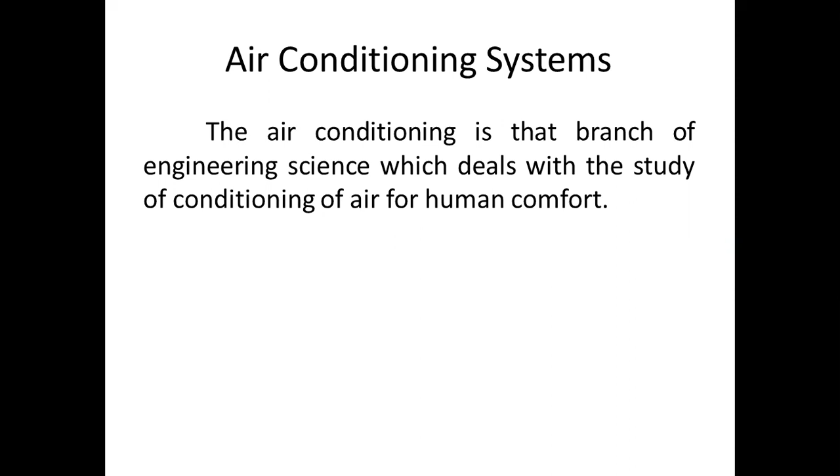Factors affecting comfort air conditioning. There are certain factors which affect the comfort air conditioning. They are temperature of air, humidity of air, purity of air, and motion of air.

So, temperature of air: in air conditioning, the control of temperature means the maintenance of any desired temperature within an enclosed space, even though the temperature of the outside air is above or below the desired room temperature.

Humidity of air. The control of humidity of air means the increasing or decreasing of moisture contents of air during summer or winter respectively in order to produce comfortable and healthy conditions.

Purity of air. It is an important factor for the comfort of a human body. It has been noticed that people do not feel comfortable when breathing contaminated air, even if it is within acceptable temperature and humidity ranges.

Motion of air. The motion or circulation of air is another important factor which should be controlled in order to keep constant temperature throughout the conditioned space.

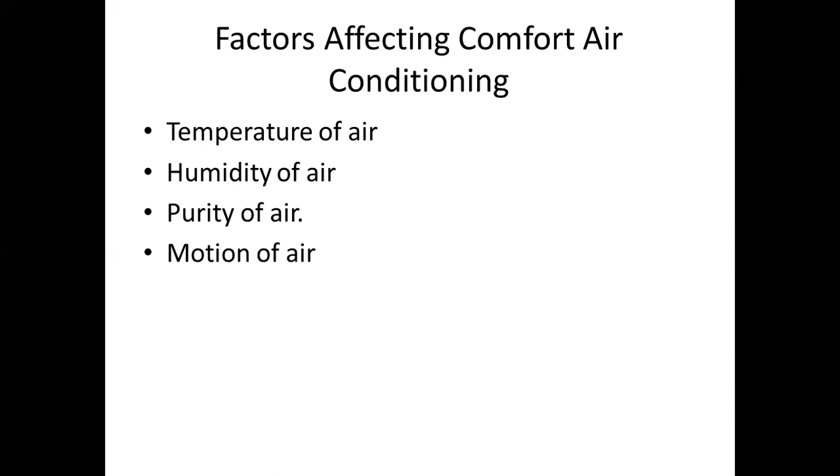Air conditioning system. The system which effectively controls the human comfort with these conditions to produce the desired effects upon the occupants of the space is known as air conditioning systems. The equipments or parts used in an air conditioning system are circulation fan, air conditioning units, supply duct, supply outlets, return outlets, and filters.

Circulation fan. The main function of this fan is to move air to and from the room. Air conditioning units. It is a unit which consists of cooling and dehumidifying process for summer air conditioning or heating and humidification processes for winter air conditioning.

Supply duct. It directs the conditioned air from the circulating fan to the space to be air conditioned at proper point. Supply outlets. These are grills which distribute the conditioned air evenly in the room.

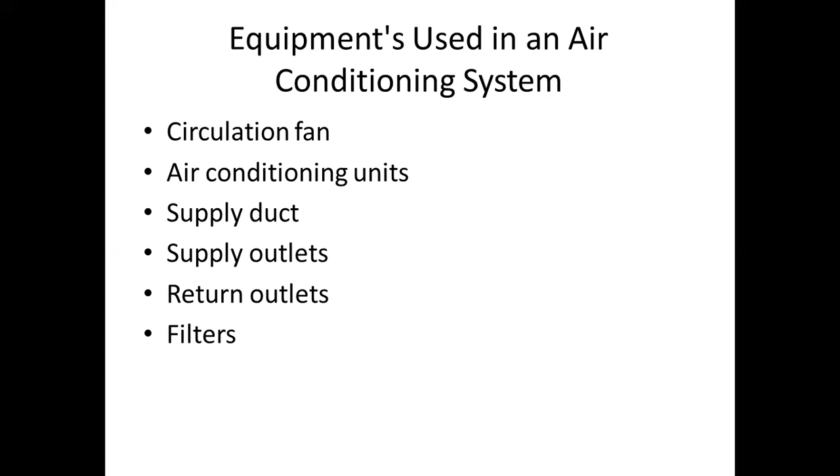Return outlets. These are the openings in a room surface which allow the room air to enter the return duct. Filters. The main function of the filters is to remove dust, dirt, and other harmful bacteria from the air.

Classification of air conditioning systems. The air conditioning system may be classified according to the purpose, according to season of the year, and according to the arrangement of equipment. First, according to the purpose, the air conditioning system is classified into comfort air conditioning system and industrial air conditioning system.

According to season of the year, the air conditioning system is classified into winter air conditioning system, summer air conditioning system, and year-round air conditioning system. According to the arrangement of equipment, the air conditioning system is classified into unitary air conditioning system and central air conditioning system.

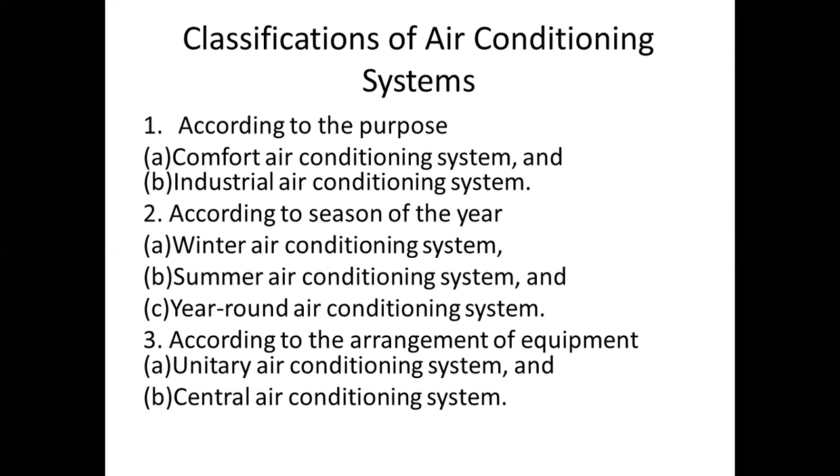Comfort air conditioning system. In comfort air conditioning, the air is brought to the required dry bulb temperature and relative humidity. If sufficient data of the required condition is not given, then it is assumed to be 21 degrees Celsius dry bulb temperature and 50% relative humidity.

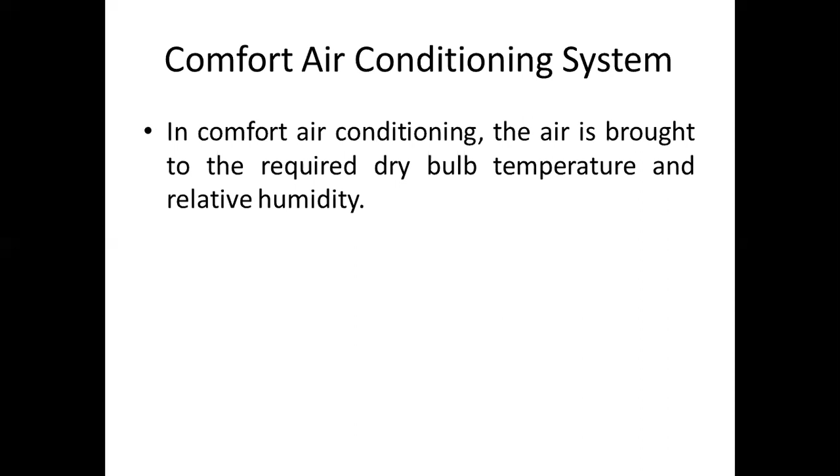Industrial air conditioning system. It is an important system of air conditioning these days in which the inside dry bulb temperature and relative humidity of the air is kept constant for proper working of the machines. Some of the sophisticated electronic and other machines need a particular dry bulb temperature and relative humidity.

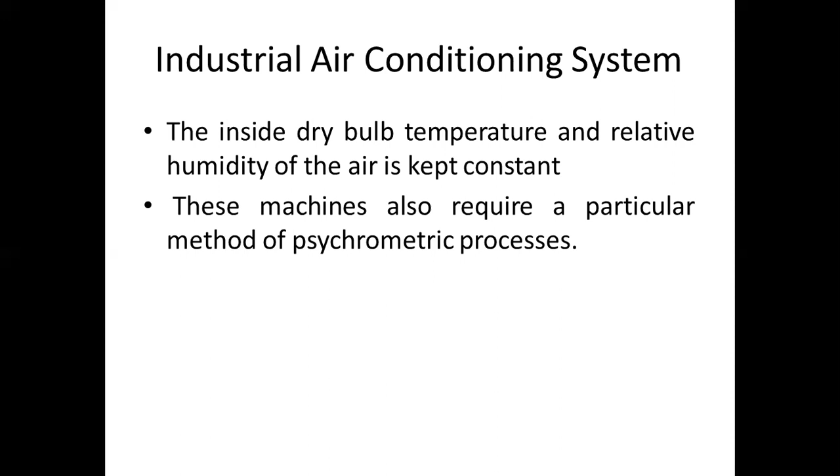Winter air conditioning systems. In winter air conditioning, the air is heated, which is generally accompanied by humidification. The outside air flows through a damper and mixes up with the recirculated air, which is obtained from the conditioned space. The mixed air passes through a filter to remove dirt, dust, and other impurities.

The air now passes through a preheat coil in order to prevent the possible freezing of water and to control the evaporation of water in the humidifier. After that, the air is made to pass through a reheat coil to bring the air to the designed dry bulb temperature. Now the conditioned air is supplied to the conditioned space by a fan.

From the conditioned space, a part of the used air is exhausted to the atmosphere by the exhaust fan or ventilators. The remaining part of the used air is again conditioned. The outside air is sucked and mixed with the recirculated air in order to make up for the loss of conditioned air through exhaust fans or ventilation from the conditioned space.

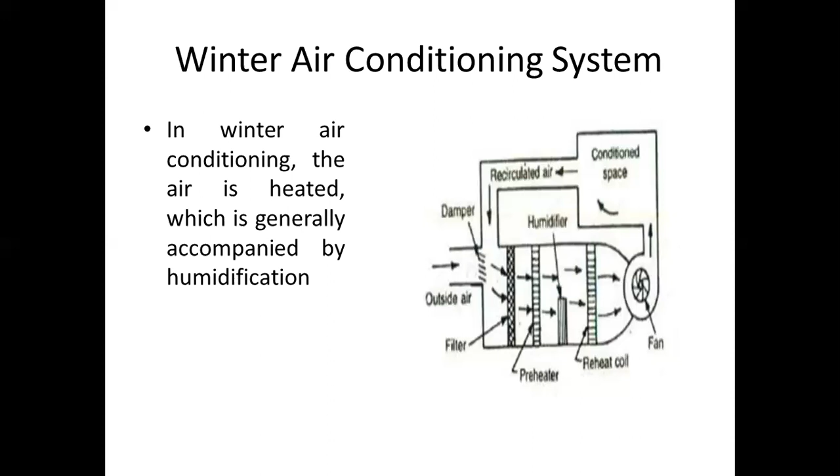Summer air conditioning system. It is the most important type of air conditioning in which the air is cooled and generally dehumidified. The outside air flows through the damper and mixes up with the recirculated air. The mixed air passes through a filter to remove dirt, dust, and other impurities. The air now passes through a cooling coil. The coil has a temperature much below the required dry bulb temperature of the air in the conditioned space.

The cooled air passes through a perforated membrane and loses its moisture in the condensed form, which is collected in a sump. After that, the air is made to pass through a heating coil, which heats up the air slightly. This is done to bring the air to the designed dry bulb temperature and relative humidity. Now the conditioned air is supplied to the conditioned space by a fan.

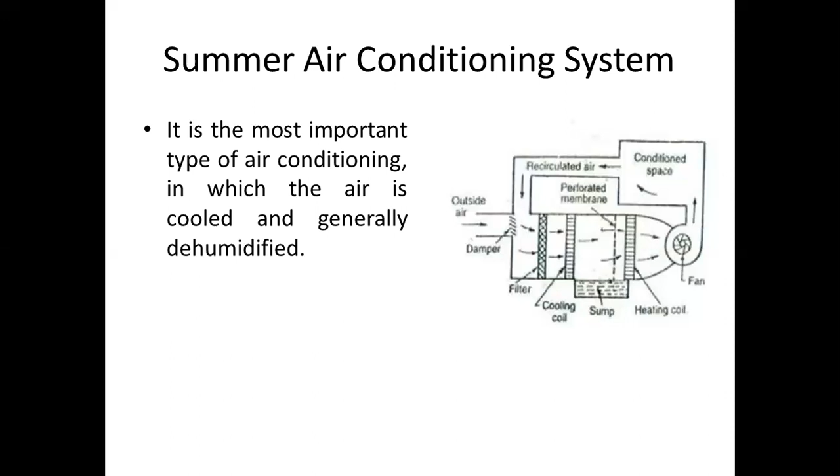From the conditioned space, a part of the used air is exhausted to the atmosphere by the exhaust fans or ventilators. The remaining part of used air is again conditioned. The outside air is sucked and made to mix with the recirculated air in order to make up for the loss of conditioned air through exhaust fans or ventilation from the conditioned space.

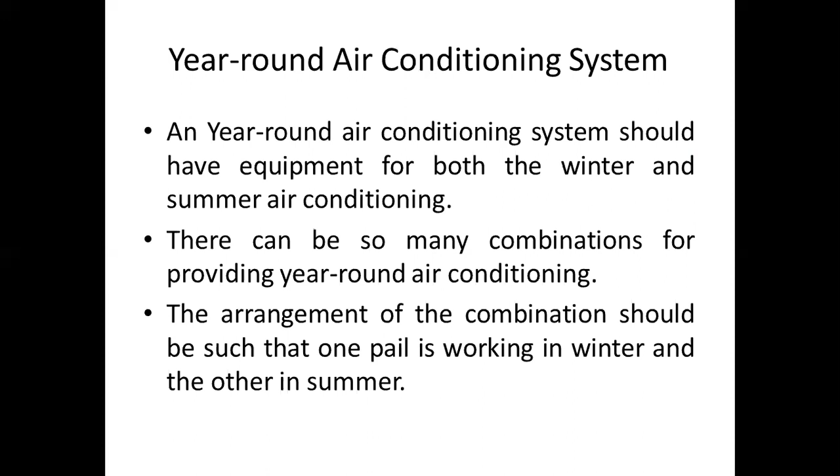Year-round air conditioning system. A year-round air conditioning system should have equipment for both the winter and summer air conditioning. There can be so many combinations for providing year-round air conditioning. The arrangement of the combination should be such that one part is working in winter and the other in summer. For example, heating and humidification is needed in winter, whereas cooling and dehumidification is needed in summer.

Unitary air conditioning system. In this system, factory assembled air conditioners are installed in or adjacent to the space to be conditioned. The unitary air conditioning systems are of two types. Number one, window units. Number two, vertical packed units. Window units. These are self-contained units of small capacity of 1 ton to 3 tons and are mounted in a window or through the wall. They are employed to condition the air of one room only. If the room is bigger in size, then two or more units are installed.

Vertical packed units. These are also self-contained units of bigger capacity of 5 to 10 tons and are installed adjacent to the space to be conditioned. This is very useful for conditioning the air of a restaurant, bank, or small office.

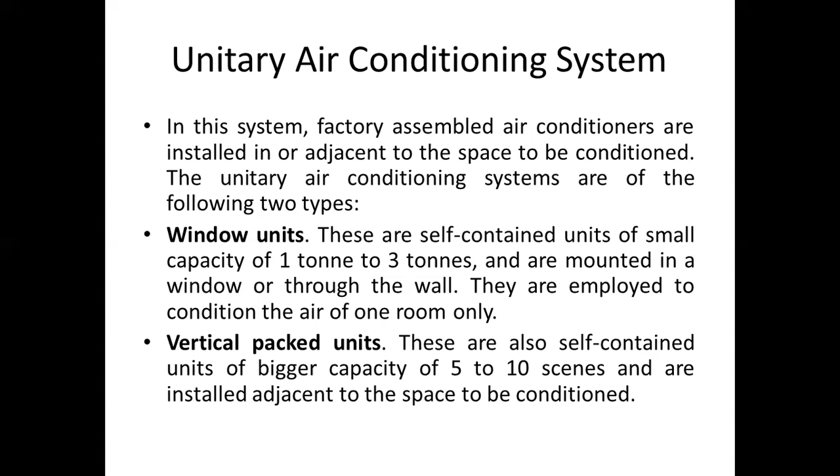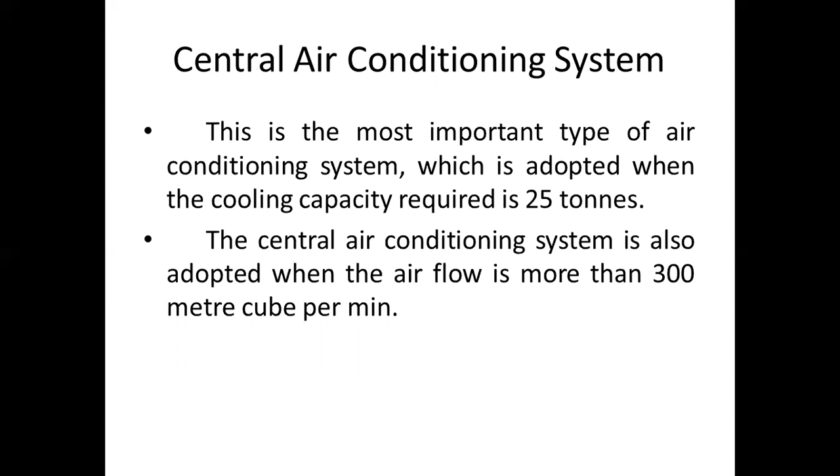Central air conditioning system. This is the most important type of air conditioning system which is adopted when the cooling capacity required is 25 tons or more. The central air conditioning system is also adopted when the airflow is more than 300 cubic meters per minute or different zones in a building are to be conditioned.